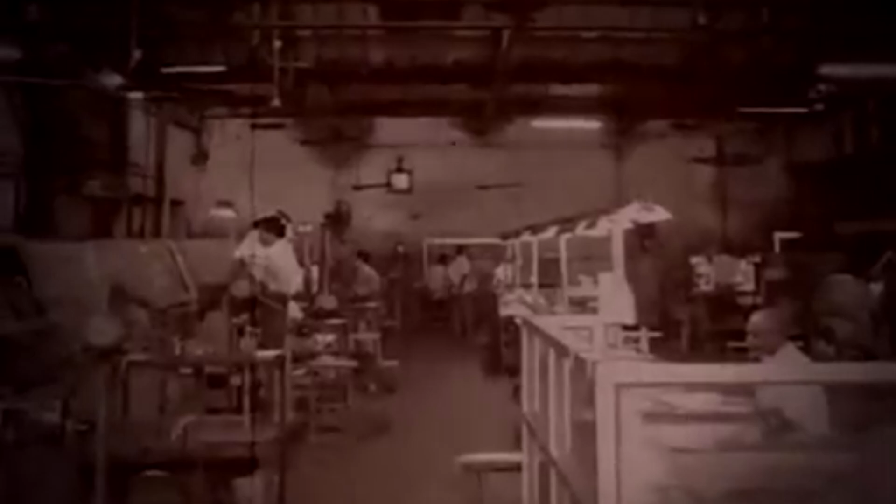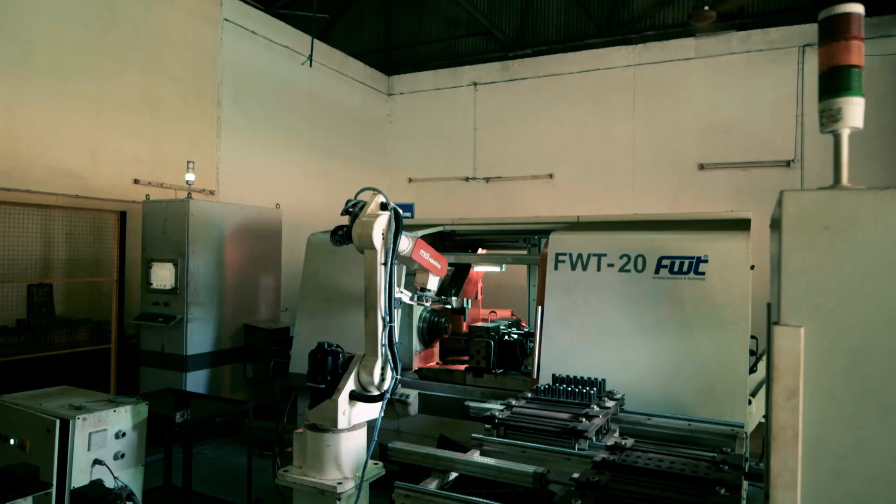And Addison, an Amalgamations Group company with innovation in its DNA, set out to pioneer the manufacturing of cutting tools in India. The beginnings were modest, with the import of machine tools followed by the manufacture of machines to make high-speed cutting tools at competitive prices for the Indian market. In over 60 years, Addison has traveled a long way in its quest for excellence.

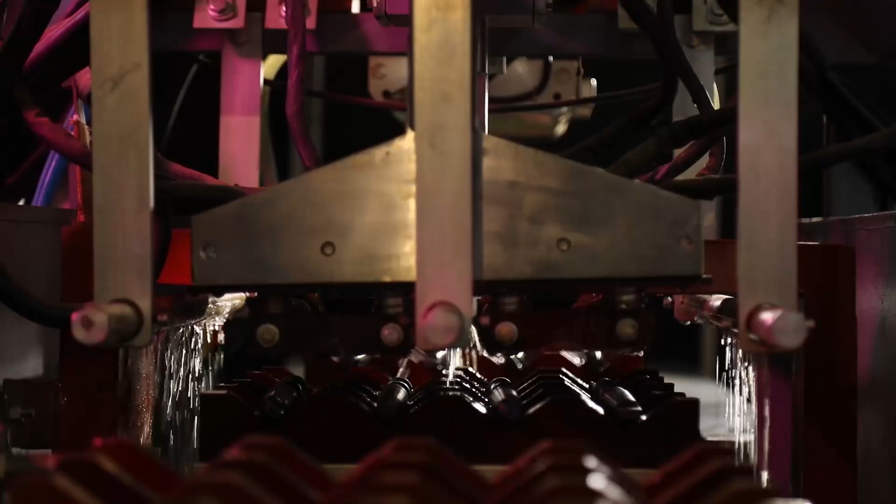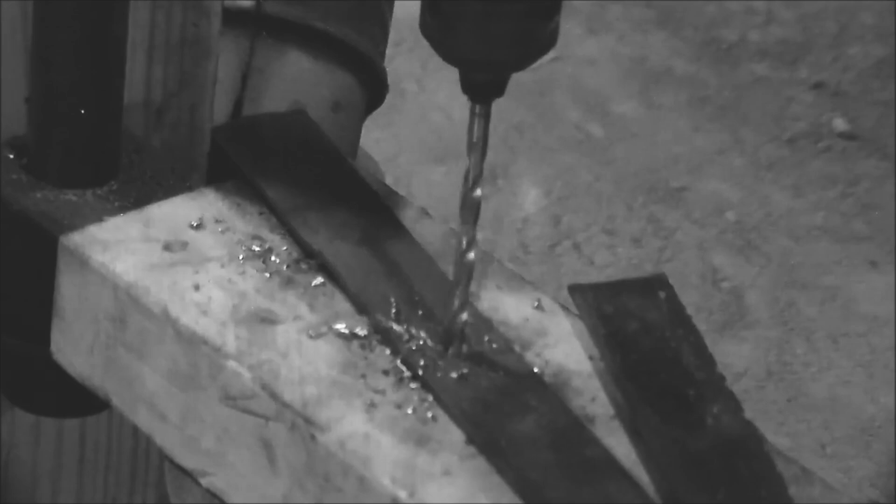All along, living up to its belief of keeping pace with changing times and technologies. Today, with markets that are evolving, materials that are revolutionizing change, and innovations that are pushing the boundaries, the needs of customers are changing too.

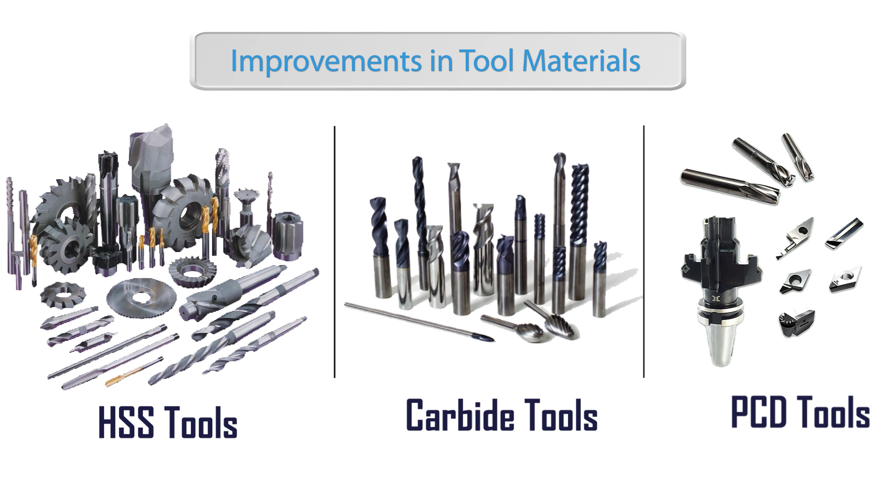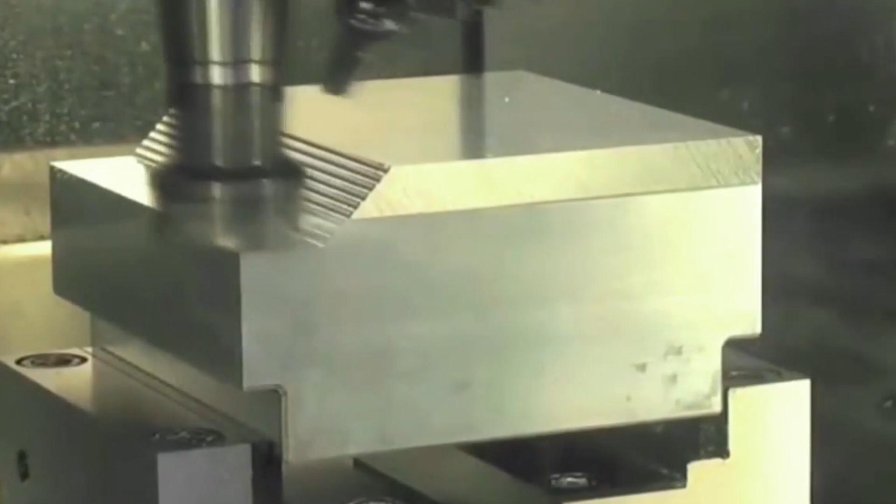Recognizing this fact, Addison has taken a step forward to help customers by using new designs and geometries for manufacturing tools that will give them an edge not only in performance but in cost too. From now on, Addison, in keeping with its innovative DNA, will not just offer tools but total tooling solutions for specific industries that are the nurseries for technology and growth in the years to come.

Transportation, electronics, energy, infrastructure, medical implants, and defense.

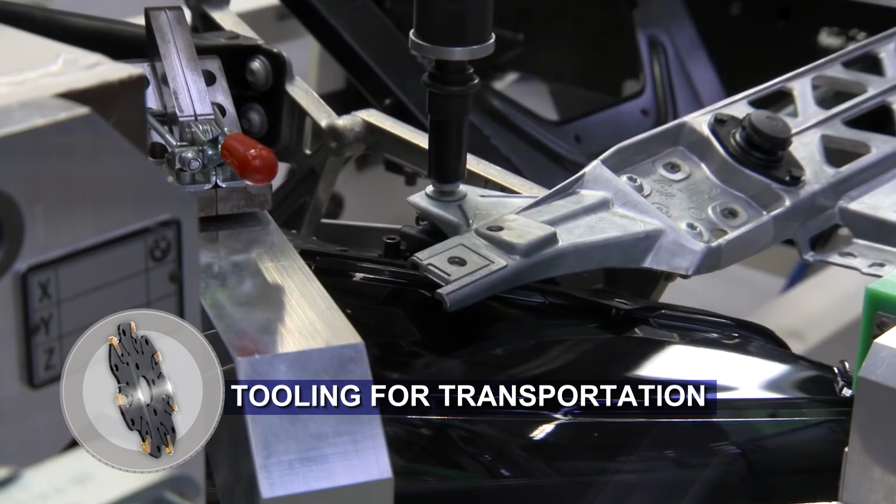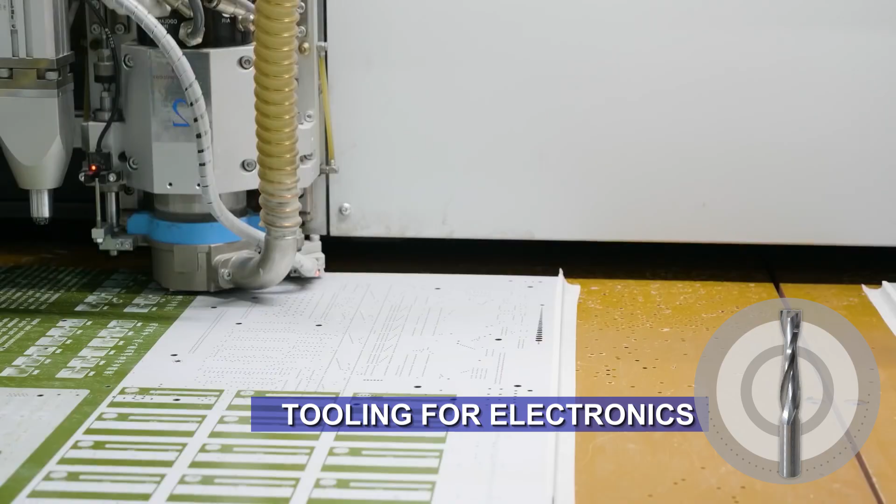The focus of transportation solutions will be primarily on productivity and accuracy, on everything from cast iron to varied materials and composites, while the solutions for electronics will concentrate on micro-machining of PCBs as well as components.

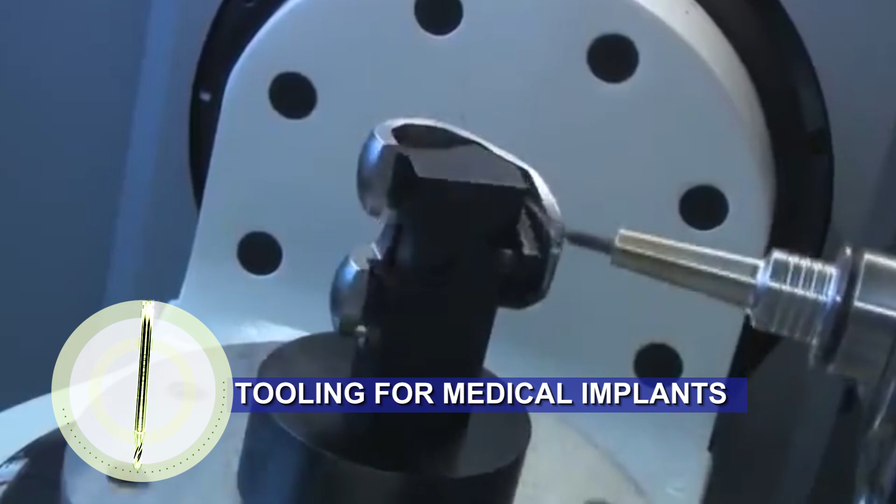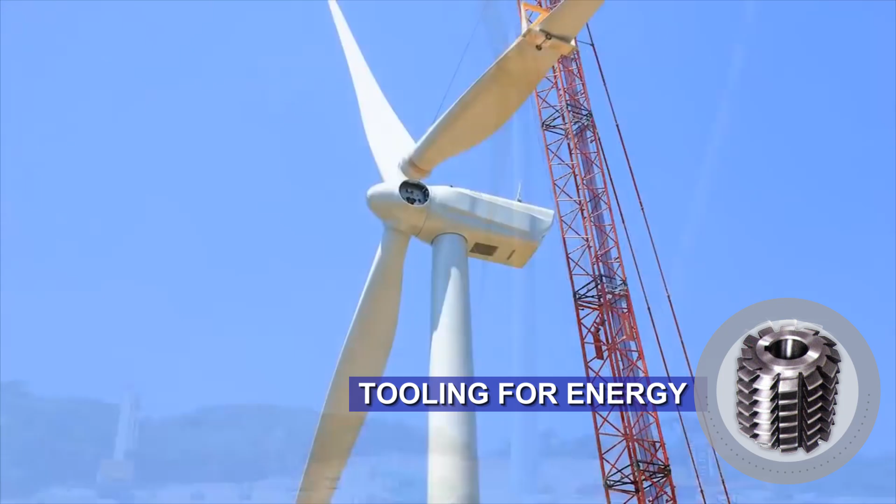In the area of medical implants, our solutions will enable our customers to work on materials like stainless steel and titanium, whereas our solutions for energy and infrastructure will bring greater focus to high productivity machining for a variety of structures across materials ranging from structural steels, alloy steels and other materials.

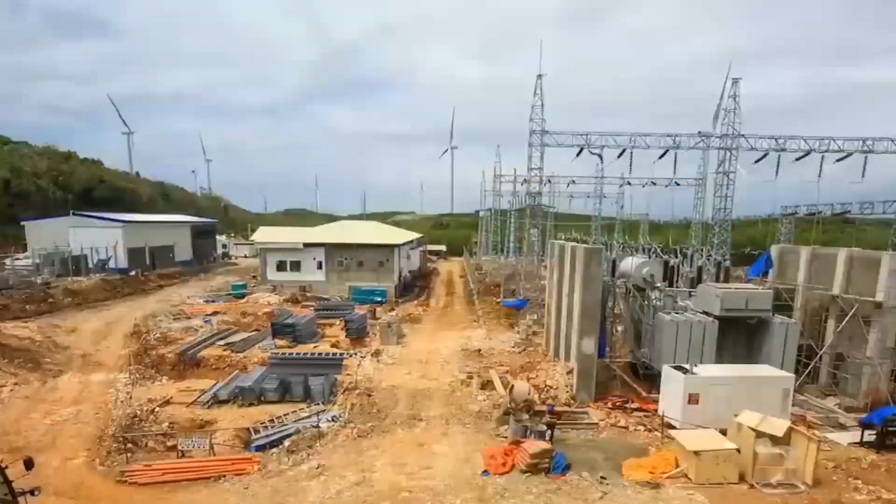And, as is to be expected in defense solutions, the challenges will be machining tough-to-grind materials like exotic alloys and ceramics. Addison now takes a step into the future with the launch of the Addison Innovation Center,

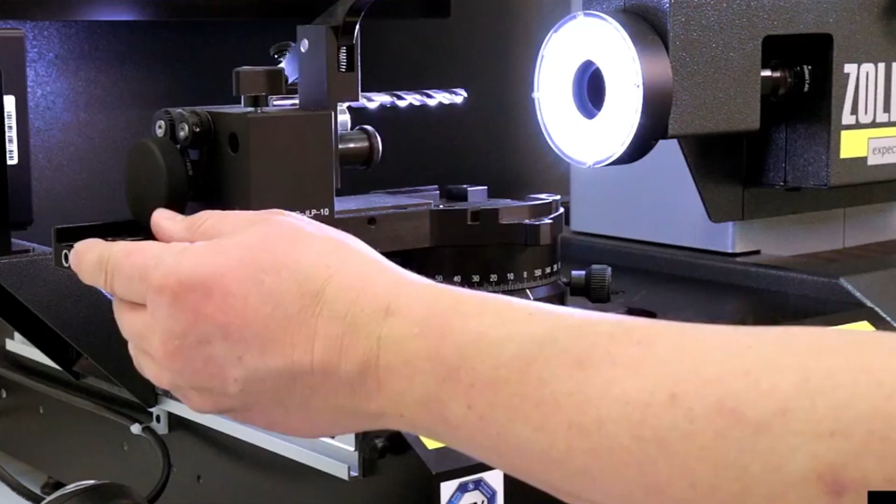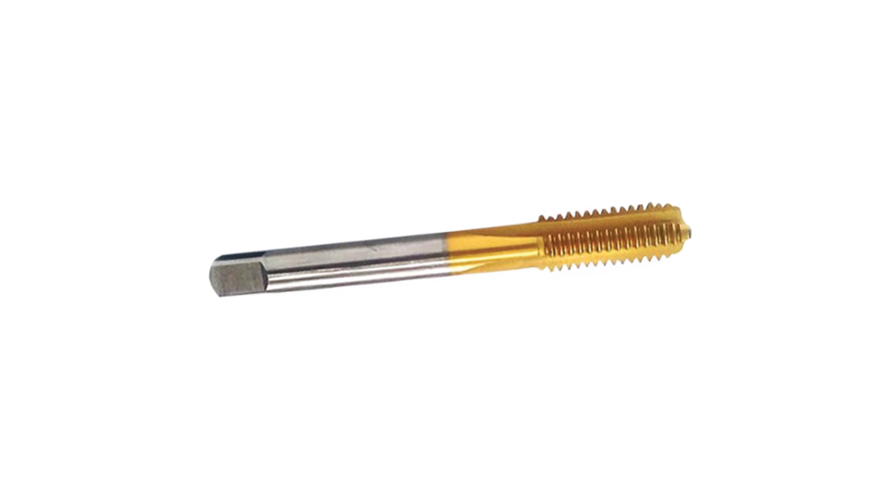a facility that will help you keep pace with engineering innovations in your field. Addison has invested in sophisticated equipment and software for measurements, design, simulation, manufacturing and testing. This means that the entire development cycle of ideation, design, prototype and testing is encapsulated into one single facility.

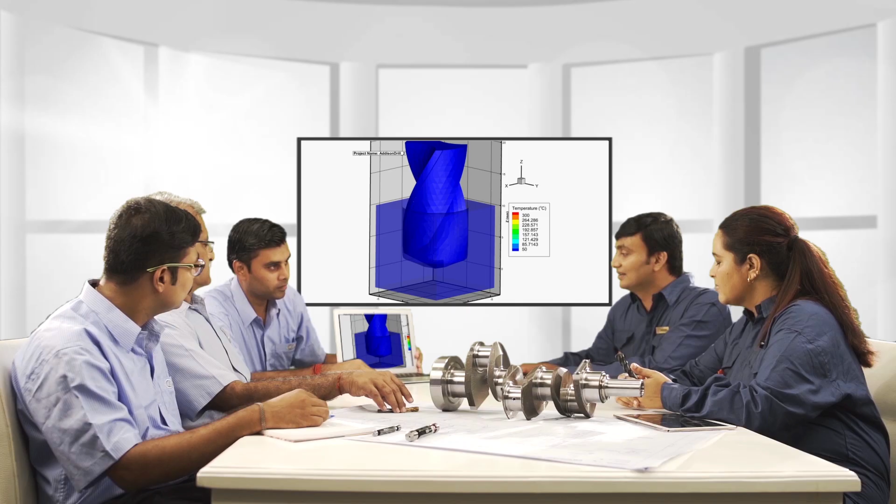Now you can get a tool with complex geometry made available to you at a competitive price. More importantly, Addison can offer decades of tooling expertise, not just at its center alone, but also remotely as well.

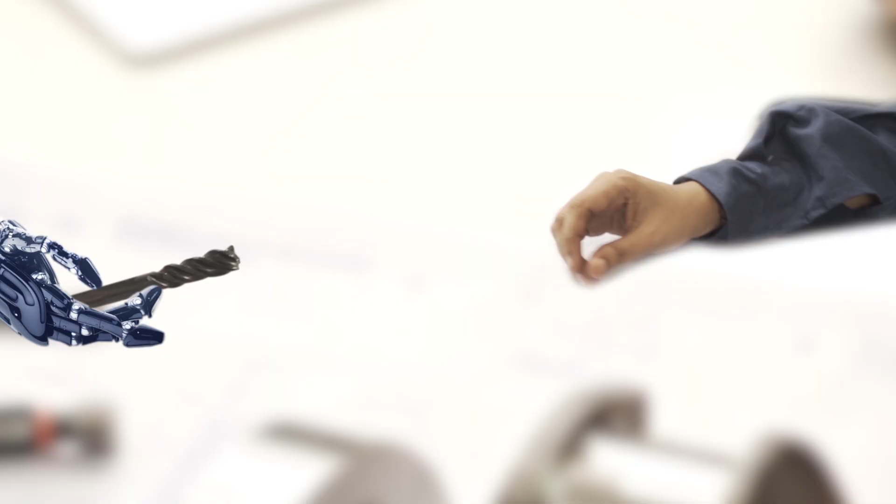Using our advanced communications platform, your R&D engineers can virtually develop tooling solutions remotely. This brings the Addison Innovation Center virtually next door to any customer in any part of the world.

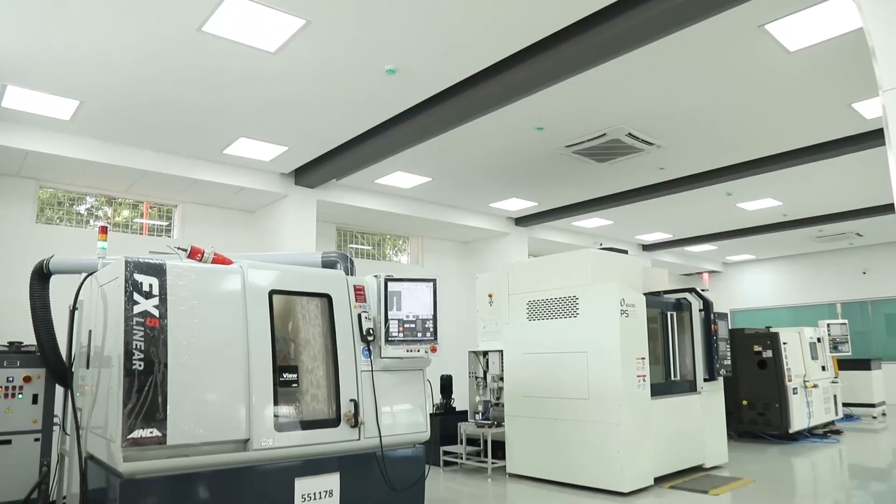Come, let's partner in progress and technological success with innovative solutions. Addison dedicates this unique innovation center to all its customers. Addison. Tools for a changing world.